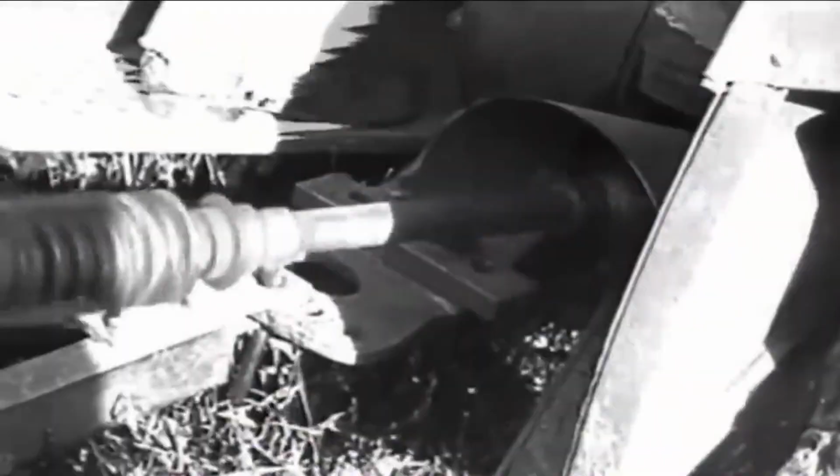The rhythmic hum of modern agriculture conceals a fascinating story about one of farming's most ingenious inventions. Every day, millions of farmers around the world rely on a mechanical marvel that transformed how work gets done in the fields. Yet most people have never stopped to consider its existence. What is this hidden hero of agriculture, and why did its invention change everything about farming as we know it?

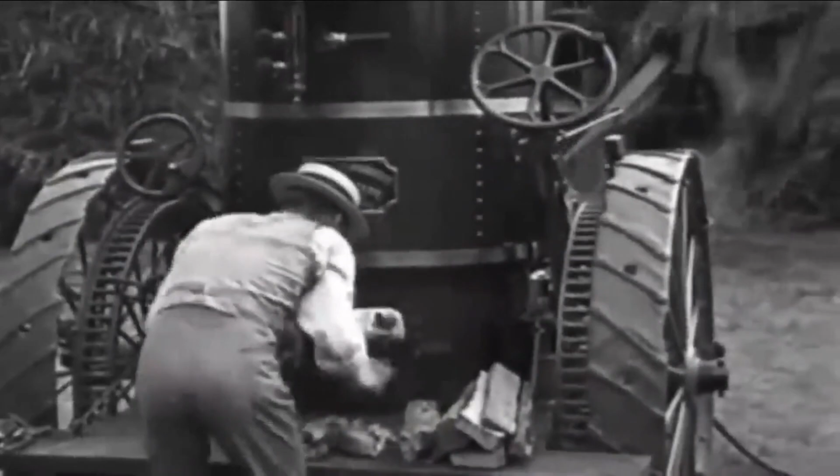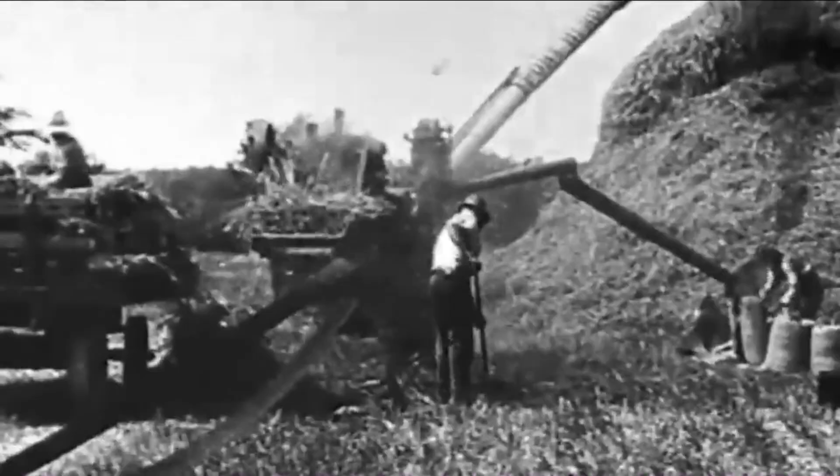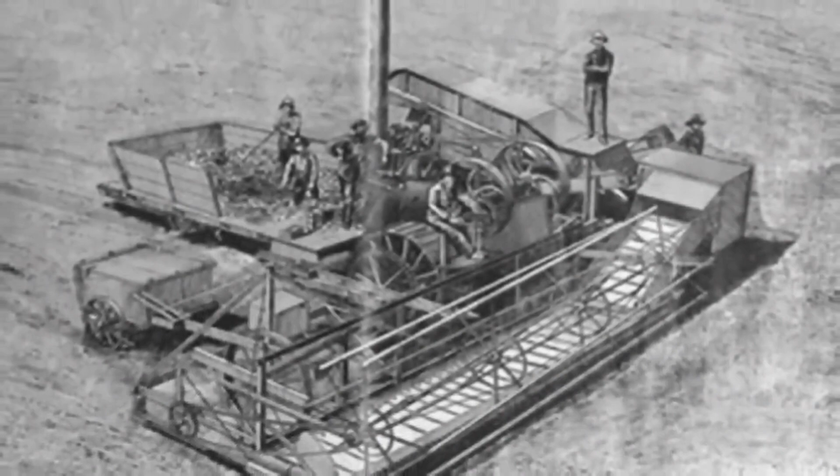Before we can understand this revolutionary device, we need to transport ourselves back to a time when farming was brutally difficult work. Picture the 1800s, when every task on a farm required either human muscle or animal strength. Farmers would spend entire days accomplishing what we can now do in mere hours. The question that haunted every agricultural worker was simple yet profound: how could anyone harness more power without requiring more horses, more oxen, or more exhausted human bodies?

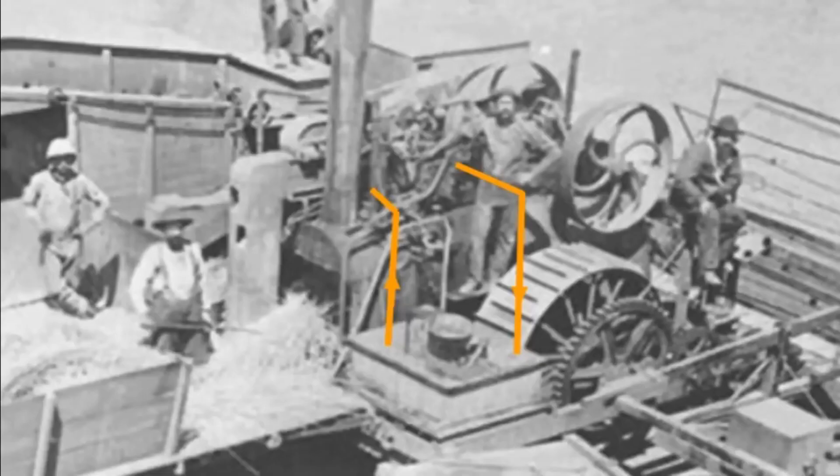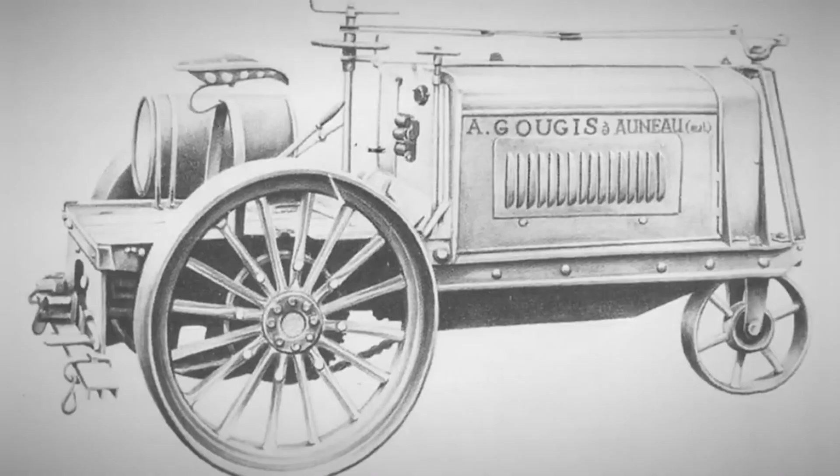The answer began to emerge with the arrival of tractors in the late 19th and early 20th centuries. These mechanical beasts promised to revolutionize agriculture by providing consistent, powerful energy that didn't need rest or food. But here's where things get interesting. The earliest tractors could pull implements across fields, but they couldn't do much else. They were essentially mobile engines on wheels.

So another question arose. If a tractor had all this power sitting there in its engine, why couldn't that power be used for other things besides just pulling?

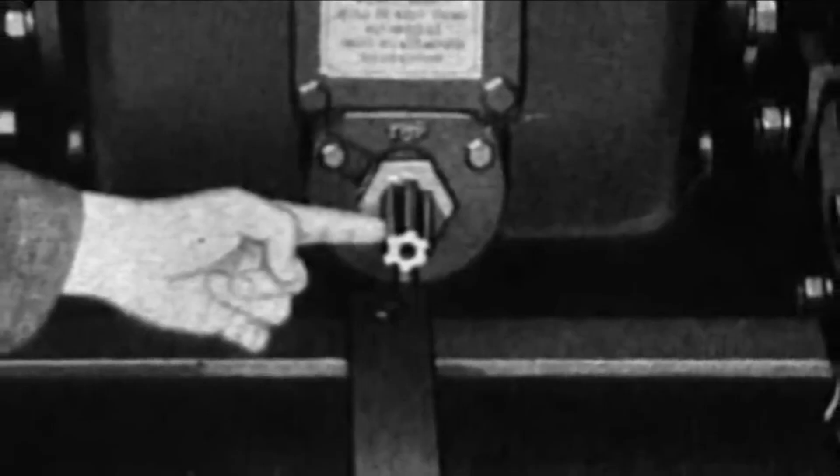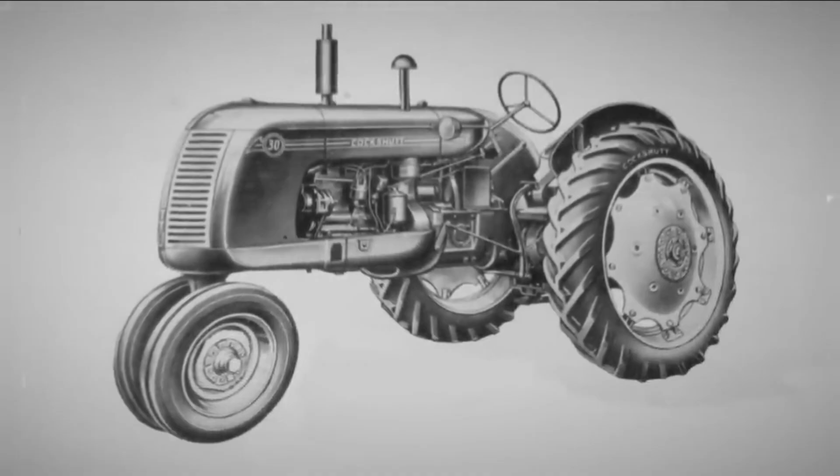Farmers quickly realized that their fields required more than just pulling power. They needed to operate grain threshers, water pumps, sawmills, and countless other machines. The conventional solution was to use belt drives. Workers would position the tractor near the equipment, then connect a long belt from a pulley on the tractor to a pulley on the machine.

This worked, but it was dangerous, inefficient, and frustrating. The belts would slip, break, and require constant adjustment. People lost fingers, hands, and sometimes their lives when clothing got caught in these exposed spinning belts. There had to be a better way, but what would it look like?

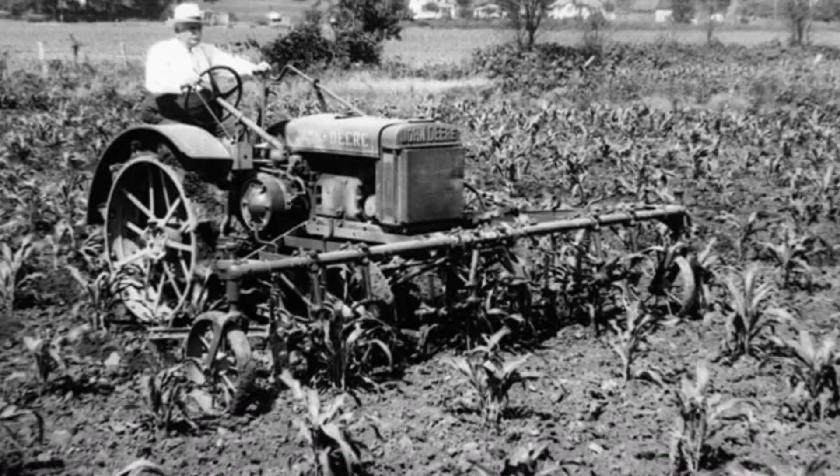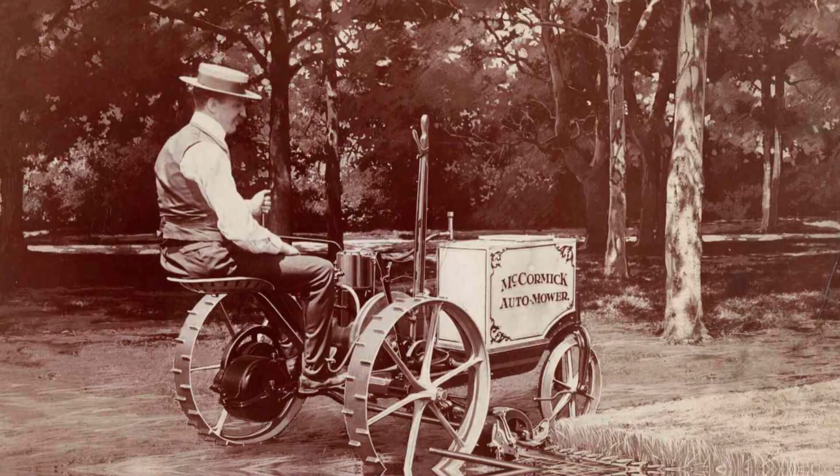The breakthrough came from understanding a fundamental principle of mechanical engineering. Power doesn't have to be transmitted through visible, external means. It can flow through protected, enclosed channels from one place to another. This idea wasn't entirely new. Industrial machinery had been using enclosed shaft systems for decades in factories. But could this concept be adapted for the rough, unpredictable world of farming?

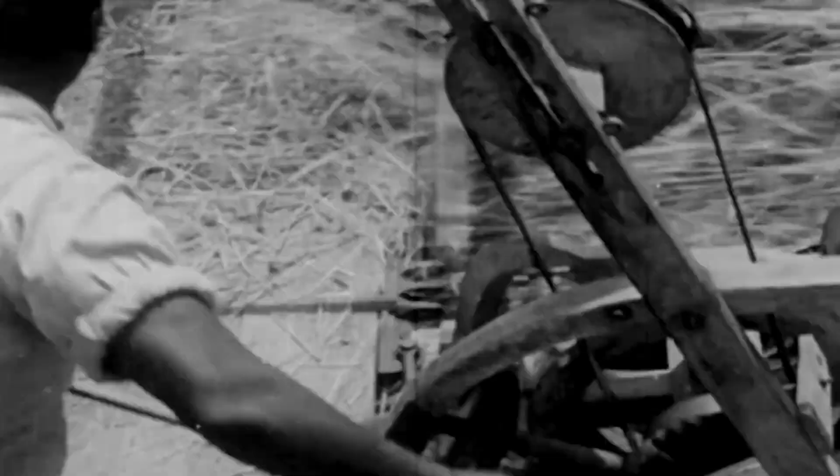Enter the power take-off, often abbreviated as PTO. This device would become the backbone of modern agricultural efficiency. But what exactly makes it so special? At its core, the PTO is deceptively simple. It's a rotating shaft that extends from the tractor, spinning at a standardized speed, ready to deliver power to any compatible implement. Think of it as a universal power outlet, but instead of electricity, it delivers mechanical rotation.

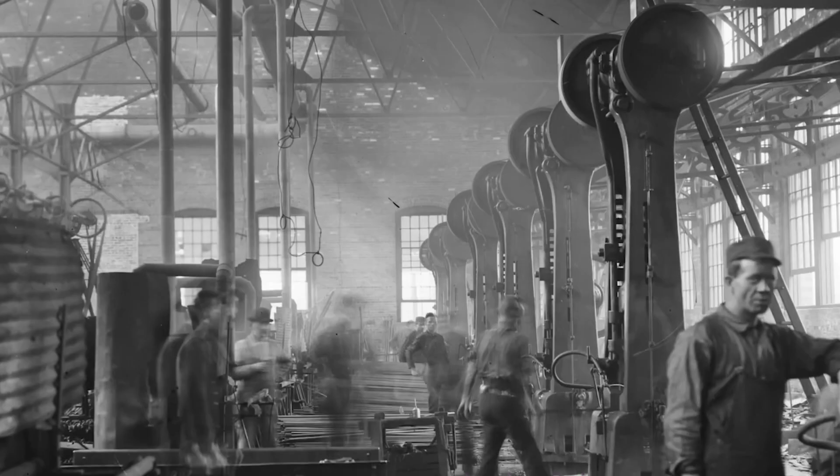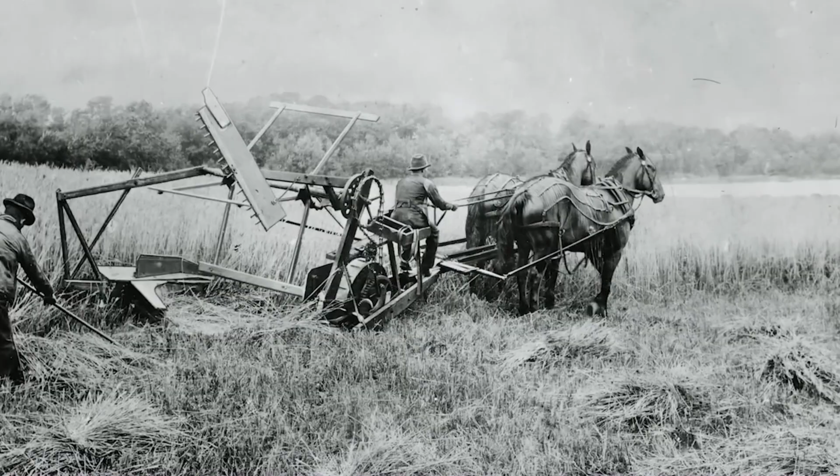The genius of this system lies in its standardization and versatility. Once tractors began including PTO shafts, implement manufacturers could design equipment that would work with any compatible tractor. A farmer could attach a mower in the morning, disconnect it at lunch, and hook up a baler in the afternoon. The same power source could drive completely different machines.

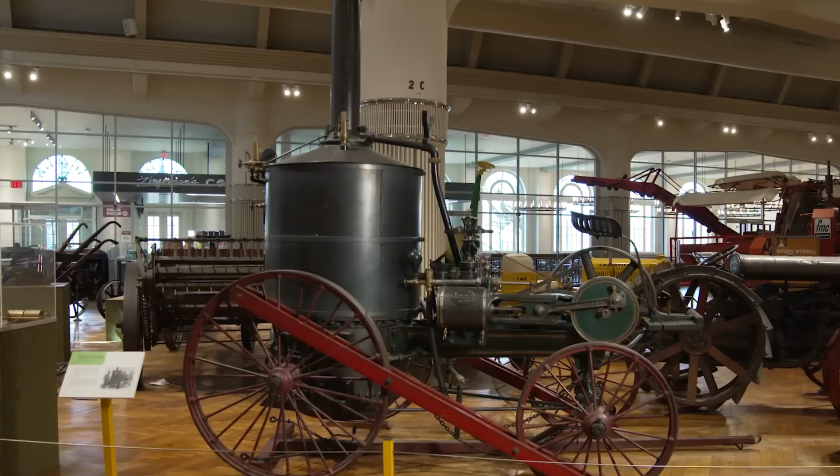Why had it taken so long for someone to develop such an obvious solution? The answer involves understanding the messy reality of agricultural innovation. Unlike factories where conditions are controlled and standardized, farms present endless variables: different crops, different terrains, different weather conditions, different implement requirements.

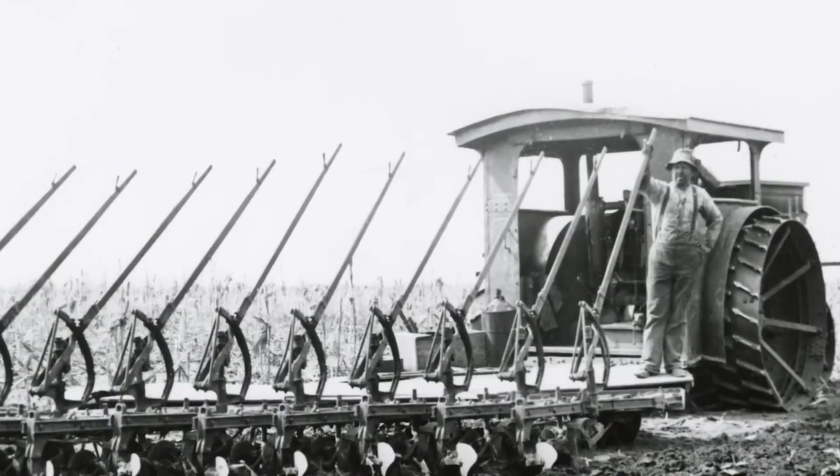Early PTO systems had to overcome numerous technical challenges. What speed should the shaft rotate? How should it connect to implements? How could it remain safe while still being accessible? The International Harvester Company was among the first to seriously tackle these questions. In 1918, they introduced tractors with a rear-mounted shaft that could power threshing machines.

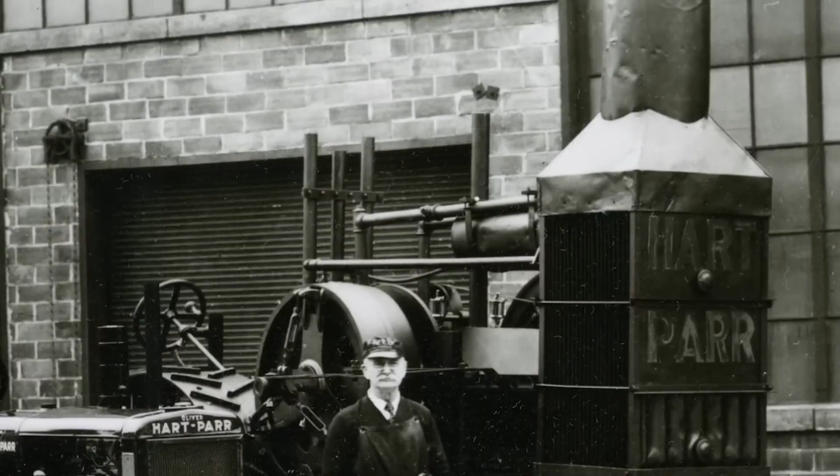Other manufacturers quickly followed. But here's where things got complicated. Each company developed their own system with different specifications. Some PTOs rotated at 540 revolutions per minute. Others used different speeds entirely. The mounting positions varied, and the connection methods differed.

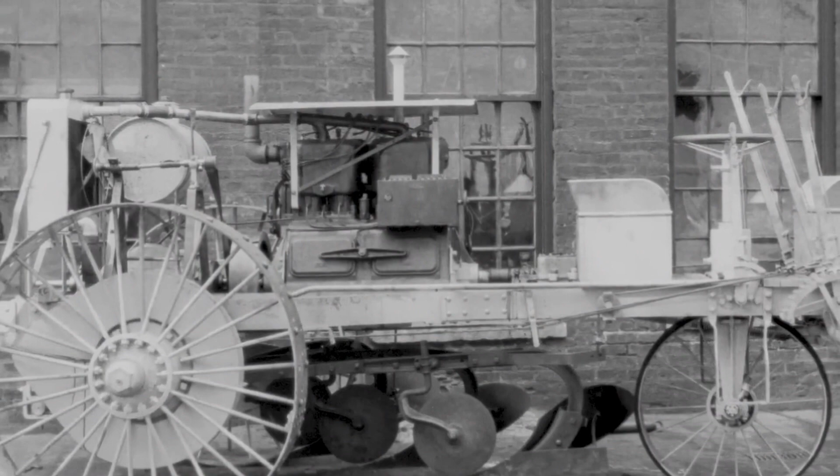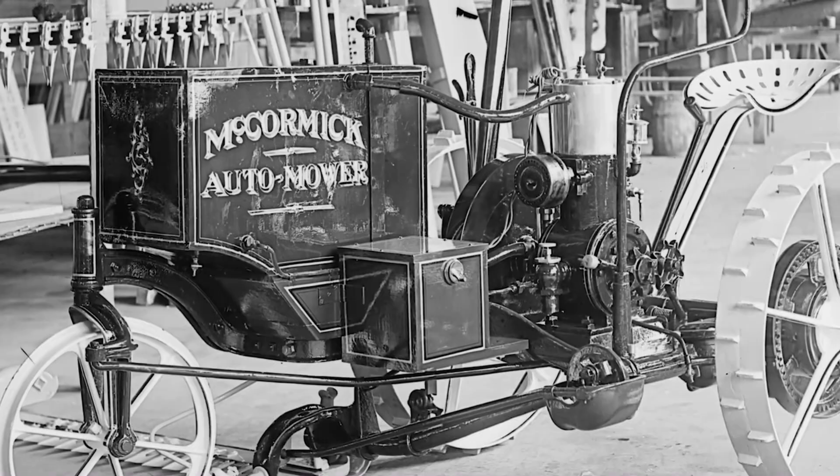It was chaos. Imagine being a farmer in the 1920s or 30s. You might own a tractor from one manufacturer and implements from several others. Would they work together? Maybe, maybe not. You might need adapters, custom modifications, or you might simply be out of luck. This lack of standardization meant that the PTO's full potential remained locked away, tantalizing but frustratingly out of reach.

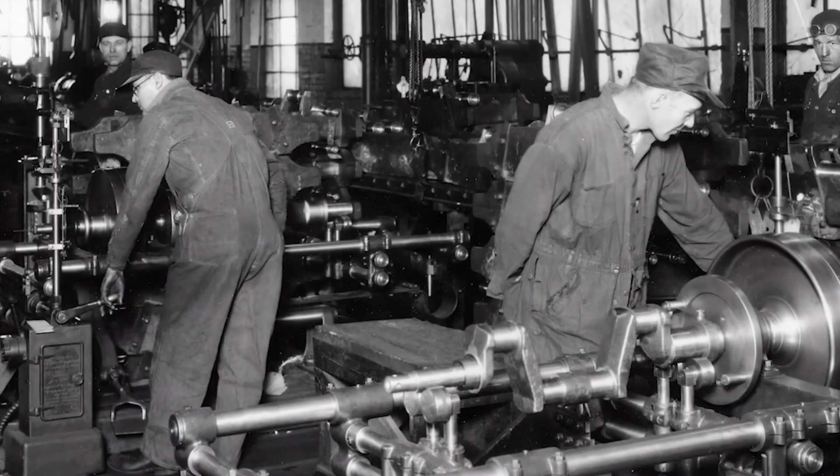Something needed to change, but who would make it happen? The answer came through cooperation and standardization efforts that began in the 1930s and continued through the 50s.

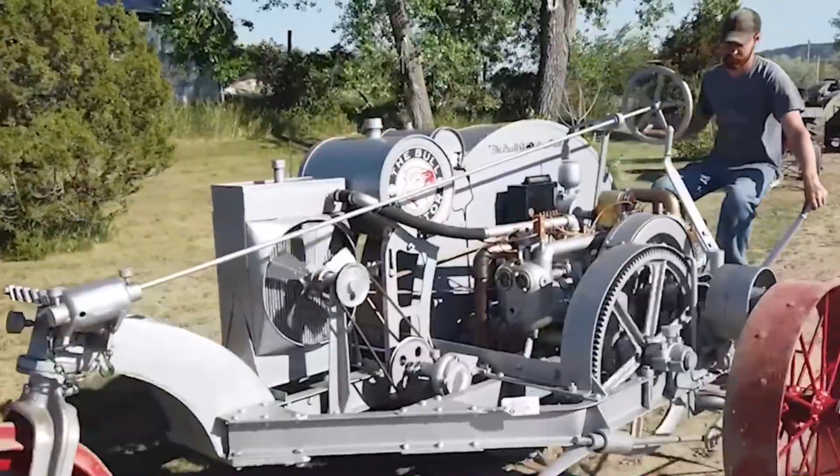Agricultural engineers, manufacturers, and farming organizations recognized that everyone would benefit from agreed-upon standards. The American Society of Agricultural Engineers took the lead in establishing specifications that would become industry norms. They determined that PTOs should typically operate at either 540 or 1,000 revolutions per minute.

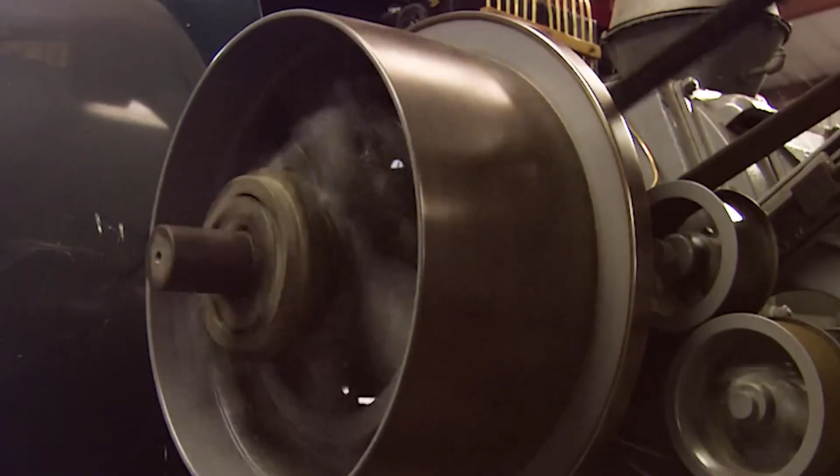They standardized the shaft diameter, the spline design, and the mounting height. Why these specific speeds? The choice wasn't arbitrary. 540 RPM became the standard because it represented a good balance for many common farm implements. It was fast enough to operate most equipment efficiently, but slow enough to be relatively safe and manageable. The 1000 RPM option came later, designed for implements that needed higher speeds, like some mowers and pumps.

These standards transformed the agricultural equipment industry overnight. Suddenly, compatibility became the norm rather than the exception.

But standardizing the tractor's output was only half the battle. The shaft that connects the tractor's PTO to the implement presented its own set of engineering challenges. This connecting shaft needed to do something rather remarkable. It had to transmit tremendous amounts of rotating power while accommodating the fact that tractors and implements move relative to each other. When a tractor turns, or when ground terrain causes the implement to shift position, the connection between them must flex and adapt without breaking or losing power transmission.

The solution came in the form of the telescoping PTO shaft, an elegant piece of engineering that deserves more appreciation than it typically receives. Picture two tubes, one inside the other, connected by splines that allow them to slide in and out while continuing to transmit rotation. At each end, universal joints permit angular movement. These joints work like the ones in your car's drive shaft, allowing the shaft to bend at angles while still spinning. Together, these features create a shaft that can extend, contract, and operate at various angles. How much engineering ingenuity went into making something that farmers could simply connect and forget about?

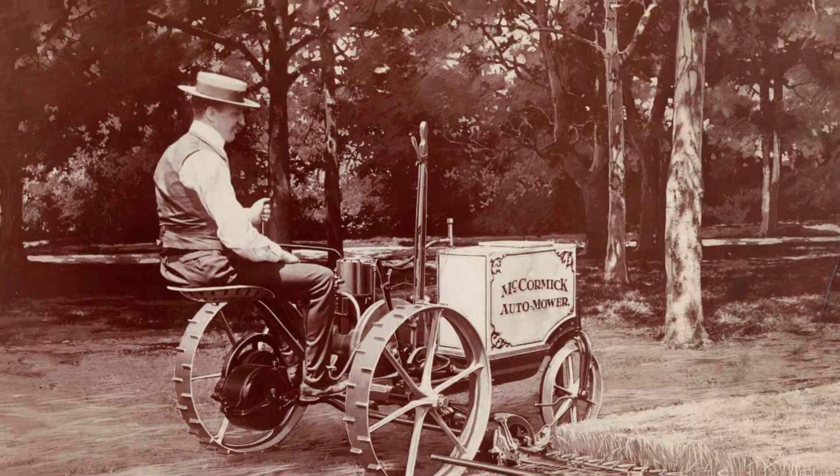The types of implements that PTOs can power seem almost limitless. Consider the rotary mower, one of the most common PTO-driven tools. The tractor's engine spins the PTO shaft, which turns the mower's blade assembly at hundreds of revolutions per minute. The same principle applies to hay balers, which compress cut hay into compact bales. The PTO drives the complex mechanical systems that gather, compress, and tie the hay, transforming loose fodder into manageable packages. Without the PTO, these operations would require separate engines for each implement, adding weight, complexity, and expense.

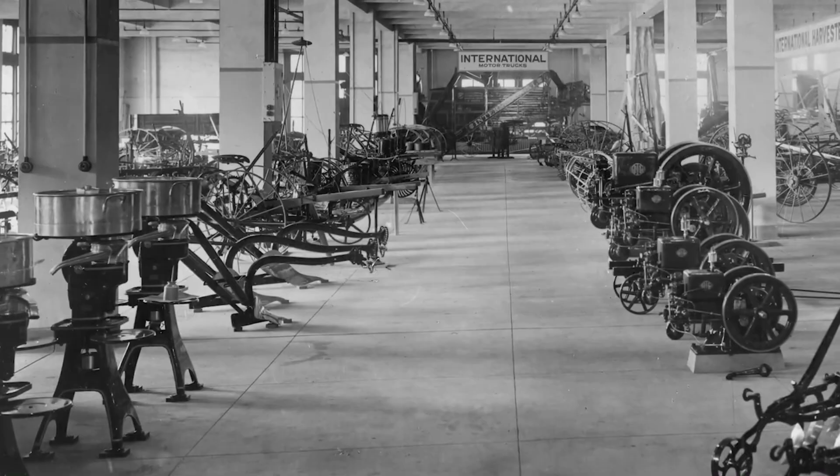Post-hole diggers represent another fascinating application. These auger-based tools drill into the earth, creating holes for fence posts. The PTO provides the sustained rotational force needed to bite through soil and roots. Pump systems for irrigation draw water from wells or streams using PTO power. Spreaders distribute fertilizer or seeds across fields with PTO-driven mechanisms that ensure even distribution. The list goes on: feed mixers, grain augers, wood chippers, snow blowers, and dozens of specialized implements for specific crops and tasks. Each one taps into that standardized power source, spinning away at the rear of the tractor.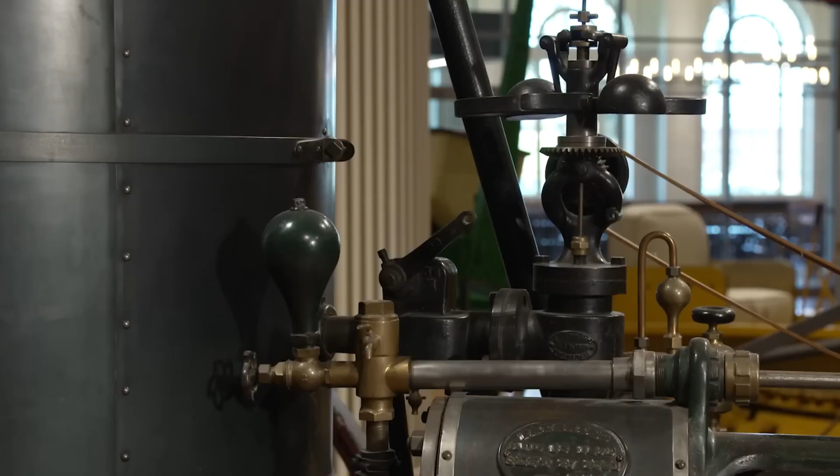But how exactly does the power travel from the tractor's engine to the PTO shaft? Understanding this reveals another layer of engineering sophistication. Inside the tractor, a series of gears and clutches connect the engine's output to the PTO shaft.

Most modern tractors offer independent PTO operation, meaning the PTO can run while the tractor is stationary, or the PTO can be disengaged while the tractor moves. This independence comes from a dedicated clutch system controlled by the operator. Older tractors use transmission-dependent PTOs, where the PTO would only spin when the tractor was in gear and moving.

This limitation meant stopping the tractor also stopped the implement, which wasn't always desirable. Imagine trying to bale hay—you want to keep the baler running continuously while you drive through the field. If your PTO stops every time you pause to adjust your position, you lose efficiency and risk jamming the machinery. Independent PTOs solved this problem elegantly, giving operators full control over when implements receive power.

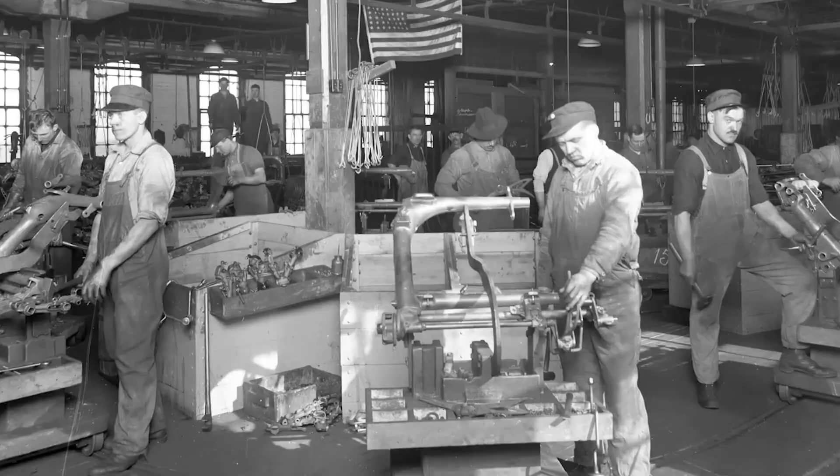The mechanical connection between implement and tractor requires careful alignment and proper installation. Farmers must measure the required shaft length, as using a shaft that's too long or too short creates problems. Too long, and the shaft might bottom out when compressed during tight turns, potentially causing damage. Too short, and the shaft might separate during operation, with catastrophic results.

Proper installation also requires ensuring that safety shields are correctly positioned and secured, that universal joints are adequately greased, and that locking pins are fully engaged. Agricultural equipment dealers and experienced farmers know these procedures intimately, but new farmers often learn through trial and error. The consequences of improper installation can range from annoying equipment malfunctions to serious safety hazards. This reality has led to extensive training programs and safety campaigns. Agricultural extension services provide education on correct PTO usage, recognizing that knowledge saves lives and equipment.

The economic impact of PTO technology on farming cannot be overstated. Before its widespread adoption, farmers needed multiple power sources for different tasks. A farm might have several small engines scattered across various implements, each requiring maintenance, fuel, and eventual replacement. The PTO system consolidated power generation into the tractor, dramatically reducing costs and complexity. One well-maintained tractor engine could power an entire farm's worth of implements. This efficiency made farming more profitable and accessible, contributing to the broader mechanization of agriculture that transformed food production worldwide.

Consider the time savings alone. Tasks that once required days can now be completed in hours. A farmer can mow, rake, and bale an entire field in a single day using PTO-driven implements. Without this technology, the same work might take a week using older methods.

Time savings translate directly to economic advantages. Farmers can manage larger operations with less labor. They can respond more quickly to weather conditions, harvesting crops at optimal times. They can diversify their operations, growing multiple crops or raising livestock alongside crop production.

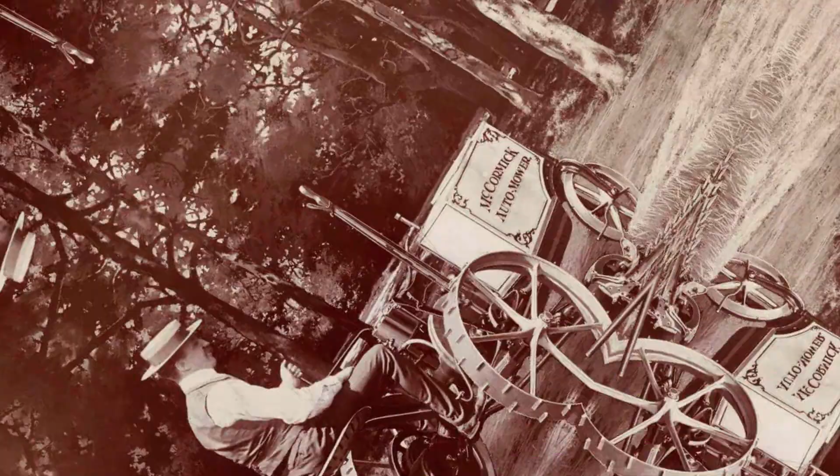Hydraulic systems have also influenced PTO evolution. While hydraulics handle many functions on modern tractors, the mechanical PTO remains essential for high-power, continuous operation tasks. Hydraulics excel at intermittent, precise movements like raising and lowering implements or operating cylinders. But for sustained rotational power, mechanical drive through a PTO shaft remains more efficient and reliable. The two systems complement each other, with modern tractors using both extensively.

The environmental implications of efficient power transmission deserve consideration too. By enabling one engine to power multiple implements, PTO systems reduce overall fuel consumption compared to having separate engines for each machine. Less fuel means lower emissions and reduced environmental impact. Modern tractors with efficient PTO systems can accomplish more work with less fuel than ever before, contributing to more sustainable agricultural practices.

Looking at the agricultural landscape today, it's remarkable to consider how thoroughly PTO technology has been integrated into farming operations. Equipment manufacturers design virtually all tractor-mounted and tractor-towed implements with PTO compatibility in mind. The standardization that once seemed like an impossible goal is now so complete that most farmers never think about it. They simply expect their equipment to work together, and it does.

The reliability of modern PTO systems is equally impressive. With proper maintenance, these mechanical connections can operate for thousands of hours without failure. The simplicity of the core design contributes to this durability. There are no complicated electronics or delicate components in the shaft itself, just hardened steel, precision machining, and robust universal joints. This reliability matters enormously in agricultural settings where breakdowns during critical operations can result in significant financial losses.

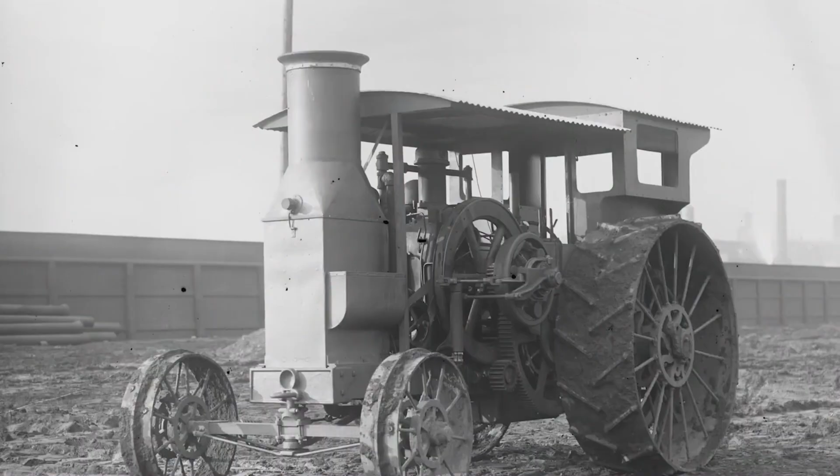Training the next generation of farmers includes comprehensive education about PTO systems. Agricultural colleges and vocational programs teach students about proper connection procedures, safety protocols, and troubleshooting techniques. Understanding PTOs isn't optional for anyone planning to work in modern agriculture—it's as fundamental as knowing how to operate a tractor or recognize crop diseases. This educational emphasis ensures that knowledge about this crucial technology continues to pass from generation to generation.

The diversity of PTO shaft designs reflects the varied demands of agricultural work. Heavy-duty shafts with larger diameters and reinforced universal joints handle high-torque applications like large balers or heavy-duty tillers. Lighter-duty shafts suffice for implements with lower power requirements. Quick connect systems have largely replaced older pin and clip connections, making it faster and easier to attach and detach implements. These seemingly minor improvements add up to significant time savings over a farming season.

Maintenance requirements for PTO systems are straightforward but essential. Universal joints need regular greasing to prevent wear and ensure smooth operation. Shields require inspection for damage and proper function. Splines should be checked for wear, and the shaft tubes should slide smoothly without binding. Neglecting these basic maintenance tasks leads to premature failure and potential safety hazards. Most farmers incorporate PTO inspection into their regular equipment maintenance routines.

The sound of a PTO shaft in operation has become one of the familiar noises of rural life. That distinctive mechanical whir, varying in pitch as load changes, signals that work is happening. Experienced farmers can often diagnose problems by sound alone, detecting bearing wear, misalignment, or excessive load by the characteristics of the noise the shaft makes. This acoustic feedback provides valuable information about system health.

Implement manufacturers publish PTO power requirements for their equipment, allowing farmers to make informed purchasing decisions. A large round baler might require 60 horsepower at the PTO, while a rotary mower might need only 35. These specifications guide farmers in building compatible equipment packages. Using an underpowered tractor with a demanding implement results in poor performance, excessive fuel consumption, and potential damage to both tractor and implement. The math isn't complicated, but it's crucial.

Climate variations affect PTO operation in ways that aren't always obvious. Cold weather makes lubricants thicker, increasing friction, and requiring more power to spin shafts and implements. Hot weather can cause thermal expansion, potentially affecting tolerances in precision components. Dust and mud can infiltrate connections if shields are damaged. Farmers in different climates develop specific maintenance practices suited to their conditions, demonstrating how agricultural technology must adapt to local environments.

The future of PTO technology likely involves increased integration with precision agriculture systems. Already, some advanced tractors can modulate PTO speed based on implement load sensors, optimizing fuel efficiency and work quality. GPS-guided systems might automatically engage and disengage PTOs based on field boundaries or obstacle detection. Electric PTOs driven by hybrid or fully electric tractor systems could offer even finer control and efficiency. Yet the fundamental principle of transmitting rotational power from tractor to implement will likely remain relevant for decades to come.

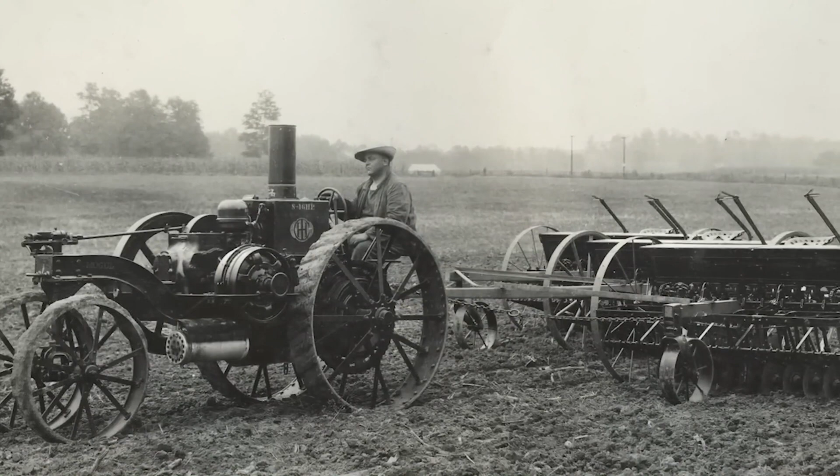Comparing modern PTO systems to their early predecessors highlights how far the technology has progressed. Early systems were crude, dangerous, and inconsistent. Modern systems are refined, safe, and utterly reliable. Yet the basic concept hasn't changed—power still flows from engine to shaft to implement through mechanical connection. This continuity demonstrates that the original vision was sound, requiring only refinement rather than reinvention.

The standardization battles of the mid-20th century offer lessons for other industries struggling with compatibility issues. When competitors recognize that cooperation on standards benefits everyone, entire industries can advance more rapidly. The PTO standardization process wasn't always smooth. Companies had to surrender proprietary advantages and accept compromises. But the result was a more vibrant, competitive market that better served customers. Similar dynamics play out today in electronics, telecommunications, and countless other fields.

Agricultural shows and demonstrations often feature PTO-driven equipment prominently.

Manufacturers showcase new implements, highlighting innovative features and improved efficiency. Farmers attend these events to evaluate equipment and learn about advances in technology.

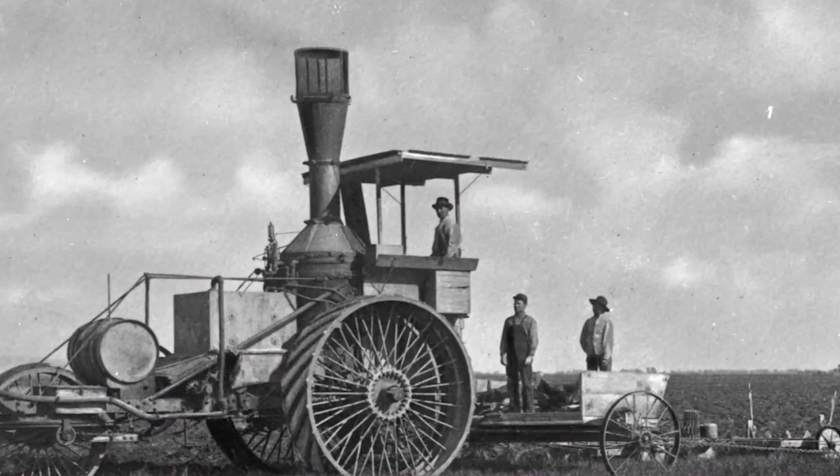As accident statistics accumulated and their human cost became undeniable, governments began mandating safety features for agricultural equipment. In the United States, the Occupational Safety and Health Administration established standards for PTO shielding. European countries implemented similar regulations. These mandates created a legal framework that pushed manufacturers to prioritize safety even when it added to production costs.

Farmers themselves sometimes resisted these safety improvements, not out of recklessness, but from practical concerns. Early shields could be clumsy and interfered with operations if not properly designed. They added weight to implements that were already heavy. And if shields became damaged during use, farmers working remotely from repair facilities might simply remove them rather than interrupt their work schedule.

This tension between safety and operational convenience sparked ongoing dialogue between farmers, manufacturers, and safety advocates about how to design protection that people would actually use.

The solution emerged through iterative design improvements informed by user feedback. Modern PTO shields incorporate quick-release mechanisms that make removal and reinstallation straightforward when legitimate maintenance requires it. They're designed with clearances that prevent interference with normal operation. And they're built from durable plastics and metals that withstand abuse while remaining relatively lightweight. These refinements made shields practical enough that most farmers now accept them as essential equipment rather than optional accessories.

Keep shields in place and in good condition. Wear fitted clothing without loose ends that could catch. Tie back long hair. Never step over or reach across a spinning PTO shaft. Disengage power before connecting or disconnecting implements. Never attempt to clear jams or adjust equipment while the PTO is engaged. These guidelines, simple in principle, but requiring constant vigilance in practice, have prevented countless accidents.

The introduction of color coding helped make PTO shafts more visible and therefore safer. Many manufacturers began producing shields in bright yellow, orange, or red. These high-visibility colors serve as constant visual reminders that a potential hazard exists. They make it easier to see the shaft's position relative to the operator's body, reducing the risk of accidental contact. For equipment used in low-light conditions, reflective strips or markings provide additional visibility.

Technological advances brought new safety features beyond physical shielding. Some modern tractors include PTO engagement systems that require deliberate action rather than simple lever movement. The operator might need to pull a lever and press a button simultaneously, reducing the chance of accidental engagement. Warning lights and audible alarms alert operators when the PTO is engaged, providing an additional layer of awareness.

These features represent the application of human factors engineering to agricultural equipment, recognizing that preventing accidents requires understanding how people actually interact with machinery. The economic cost of PTO accidents extended far beyond medical bills and lost productivity.

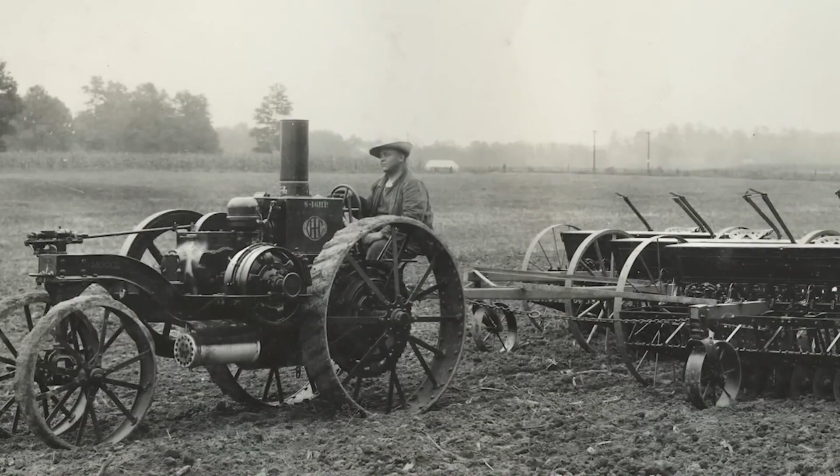The agricultural equipment rental industry faces unique challenges regarding PTO safety. When multiple operators use the same equipment, maintaining consistent safety practices becomes more difficult. Rental companies must ensure that shields remain in place, despite being handled by numerous users with varying levels of experience and care. They must provide clear instructions about proper operation, and they must inspect equipment thoroughly between rentals. These requirements add to operational costs, but are essential for protecting users and limiting liability.

Children on farms represent a particularly vulnerable population regarding PTO hazards. Farm families often involve children in agricultural work from young ages, teaching them responsibility and work ethic while contributing to family operations. However, children may lack the judgment and impulse control to consistently follow safety protocols around dangerous equipment. Many farm accidents involving PTOs have child victims. This reality has led to specific educational programs aimed at teaching farm safety to young people and encouraging parents to restrict children's access to operating equipment until they're mature enough to handle the responsibility.

The mechanics of how universal joints function within PTO shafts deserves deeper exploration. These joints, also called U-joints or cardan joints, consist of a cross-shaped piece with bearings at each arm end. The cross connects two yokes, one attached to each shaft section. As the shafts rotate at an angle relative to each other, the cross rocks back and forth within the bearings.

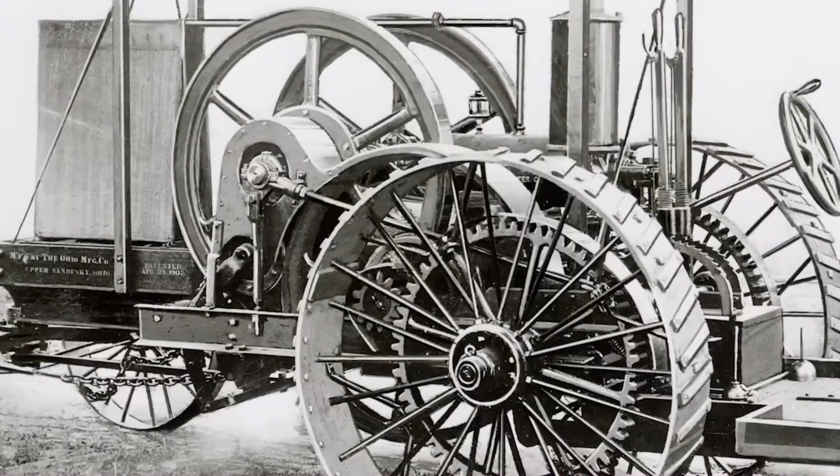Each universal joint has a maximum angle at which it can operate efficiently. Exceed this angle, and several problems occur. The joint binds and creates resistance. Bearing wear accelerates dramatically, and the rotational speed varies throughout each revolution, creating vibration and uneven power delivery. This phenomenon, called angular acceleration, becomes more pronounced as the angle increases. Manufacturers specify maximum operating angles for their PTO shafts, typically between 30 and 40 degrees. Exceeding these specifications leads to premature failure and poor implement performance.

The telescoping sections of PTO shafts use splined connections to transmit torque while allowing linear motion. These splines are precision-machined grooves running along the shaft length. The inner and outer tubes have matching male and female splines that slide relative to each other while maintaining rotational coupling. The splines must be manufactured to exacting tolerances. Too loose, and they'll wear rapidly and create dangerous play. Too tight, and they'll bind rather than sliding smoothly. This precision manufacturing contributes significantly to PTO shaft cost, but is essential for reliable operation.

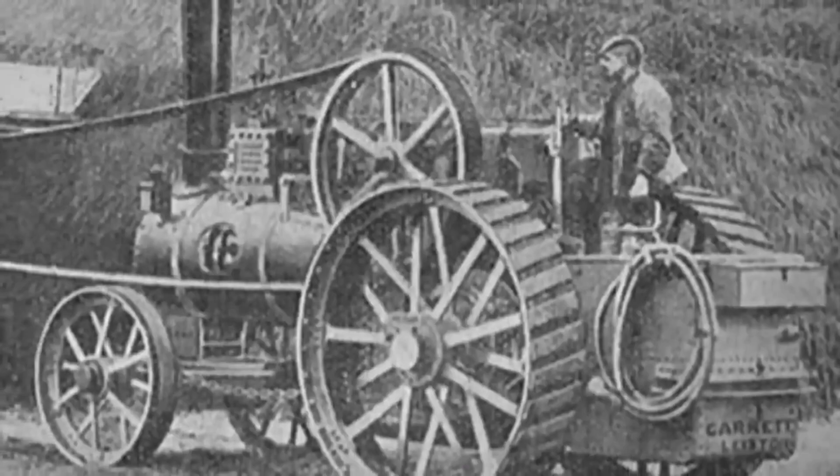Lubrication of splines and universal joints represents critical maintenance that many operators neglect. The constant sliding motion of telescoping sections generates friction and heat. Without adequate lubrication, metal grinds against metal, creating wear particles that accelerate degradation. Universal joint bearings operate under tremendous pressure and speed. Their needle bearings require regular greasing to maintain the oil film that prevents metal-to-metal contact. Most PTO shafts include grease fittings at each universal joint and along the telescoping sections. The recommended maintenance schedule typically calls for greasing every 8 to 10 hours of operation, though conditions like dust or moisture exposure might require more frequent attention.

Different types of PTO shafts serve specialized purposes beyond the standard agricultural applications. Industrial PTOs on trucks and utility vehicles power auxiliary equipment like hydraulic pumps, generators, and compressors. These often operate at different speeds than agricultural PTOs and may include additional features like automatic engagement based on engine speed or vehicle park brake status. Marine PTOs on fishing vessels power winches and processing equipment. Even some vintage automobiles included PTO options for operating tire pumps or other accessories.

The torque capacity of a PTO shaft depends on multiple factors. Shaft diameter plays an obvious role, with larger shafts capable of transmitting more torque before twisting or failing. Material properties matter too, with heat-treated alloy steels providing strength and durability. The spline design affects capacity as well, with more splines distributing load across more contact points. Manufacturers rate their shafts for specific torque values, and users must select shafts appropriate for their application. Using an undersized shaft risks failure during operation, potentially causing equipment damage or injury.

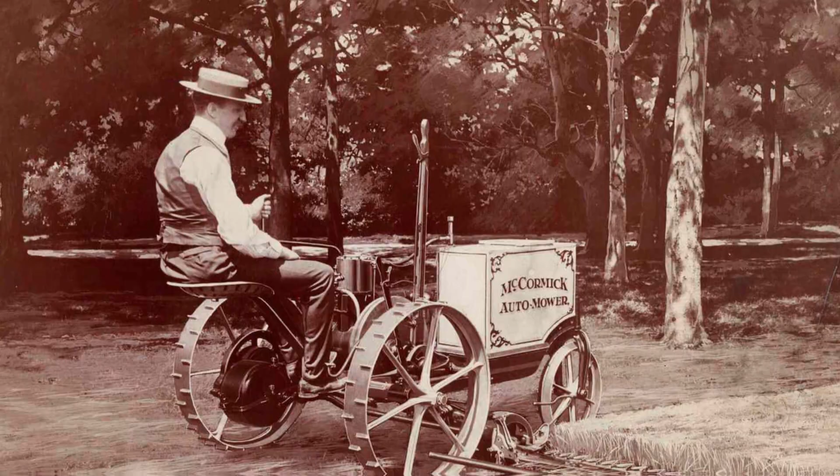These systems use electronic controls and variable ratio transmissions to provide any speed within a specified range. This flexibility allows precise matching of PTO speed to implement requirements, optimizing both performance and efficiency. An implement designed to operate at 750 RPM can receive exactly that speed rather than being forced to accept a standard speed and use internal gearing to achieve the desired operating speed. This technology represents the cutting edge of PTO development, though its complexity and cost currently limit adoption mostly to high-end tractors.

The transition from mechanical to electronic control systems has transformed how operators interact with PTOs. Older tractors used simple mechanical levers directly connected to clutches and shifters. Pull the lever, engage the PTO, push it back, disengage. Modern tractors might use switches or buttons that send signals to solenoid-actuated clutches.

This electronic intermediation enables additional features like soft start and stop, where PTO engagement happens gradually rather than suddenly. Soft engagement reduces shock loads on implements and driveline components, extending their service life. It also makes operations smoother and more pleasant for the operator.

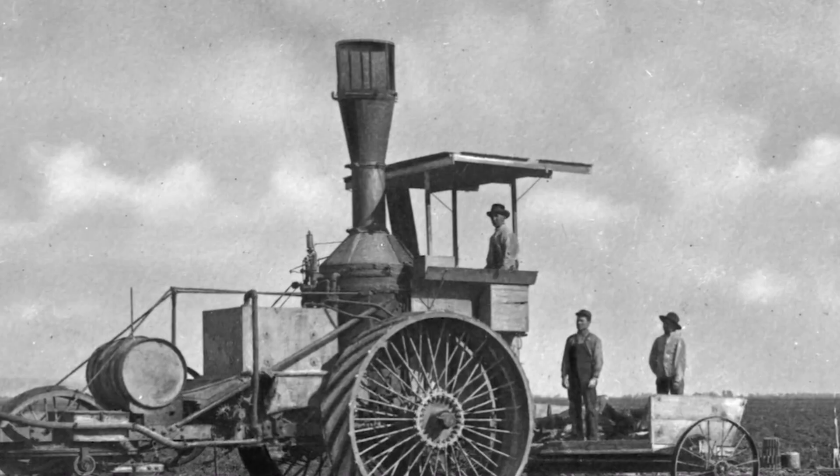Monitoring systems on advanced tractors track PTO operation and alert operators to potential issues. Sensors measure shaft speed, torque output, and temperature at various points. If torque exceeds safe levels, the system might automatically disengage the PTO to prevent damage. If temperature rises above normal ranges, indicating inadequate lubrication or excessive load, warning lights and alarms alert the operator. These monitoring capabilities transform PTO operation from a relatively blind mechanical process into one with full visibility into operating parameters.

The global nature of modern agriculture means that equipment standardization extends beyond physical dimensions to include regulatory compliance across different jurisdictions. A tractor manufactured in Germany for sale in Australia must meet Australian safety standards. An implement made in the United States for export to Brazil must comply with Brazilian regulations. This international regulatory complexity has generally converged around similar requirements, thanks in part to international standards organizations that work to harmonize rules across borders. The result is that PTO equipment can move relatively freely in international trade, benefiting farmers worldwide with access to diverse, competitive equipment options.

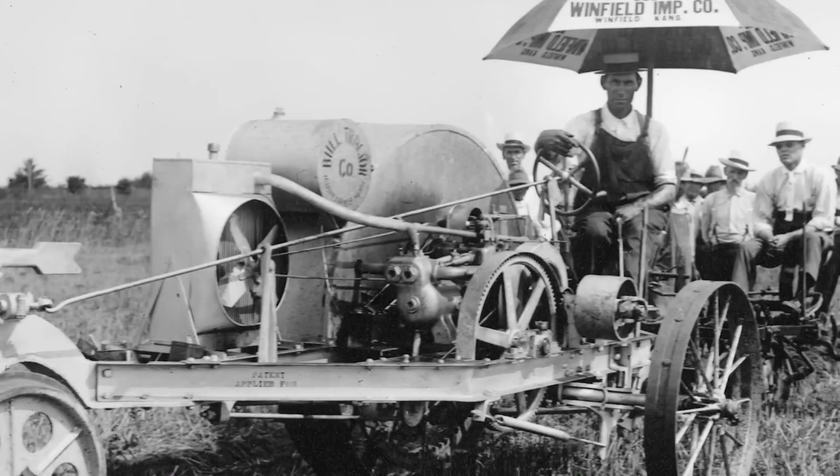Training simulators have emerged as valuable tools for teaching safe PTO operation without the risks associated with real equipment. These simulators use virtual reality or computer displays to recreate the experience of operating tractors and PTO-driven implements. Trainees can practice connecting implements, engaging PTOs, and responding to various scenarios including equipment malfunctions and emergency situations. The simulators can introduce dangerous situations that would never be created with real equipment for training purposes, allowing learners to experience the consequences of unsafe practices without actual risk. As this technology becomes more affordable and sophisticated, its use in agricultural education will likely expand.

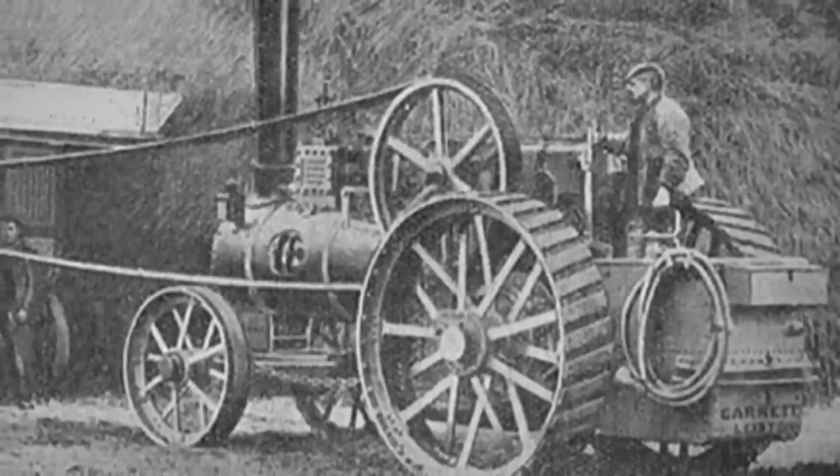The relationship between PTO shaft length and universal joint angles requires careful consideration during installation. When a shaft is fully compressed, meaning the telescoping sections are pushed together as far as possible, the angles at the universal joints should not be at their maximum. Similarly, when fully extended, the shaft should still have overlap in the telescoping section and reasonable joint angles. Achieving this ideal requires selecting the correct shaft length for each specific tractor and implement combination.

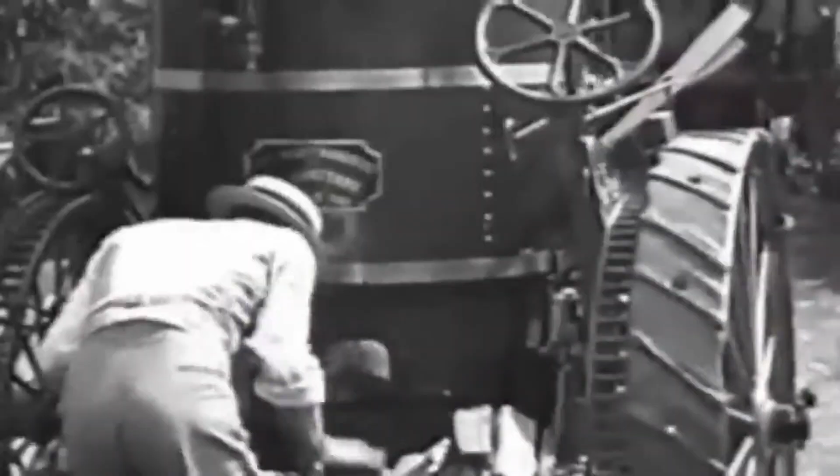Many shafts can be cut to length during installation, but this process requires precision tools and careful measurement to ensure the internal splines aren't damaged.

Environmental conditions dramatically affect PTO shaft lifespan. Equipment operating in dusty conditions, such as during grain harvesting or in arid climates, experiences accelerated wear as dust particles infiltrate bearings and splines. Moisture from rain, dew, or working in irrigated fields promotes corrosion, particularly if shafts aren't cleaned and dried after use. Chemicals from fertilizers and pesticides can degrade seals and attack metal surfaces. Farmers in harsh environments often implement additional maintenance procedures such as more frequent lubrication, regular washing, and protective coatings on vulnerable components.

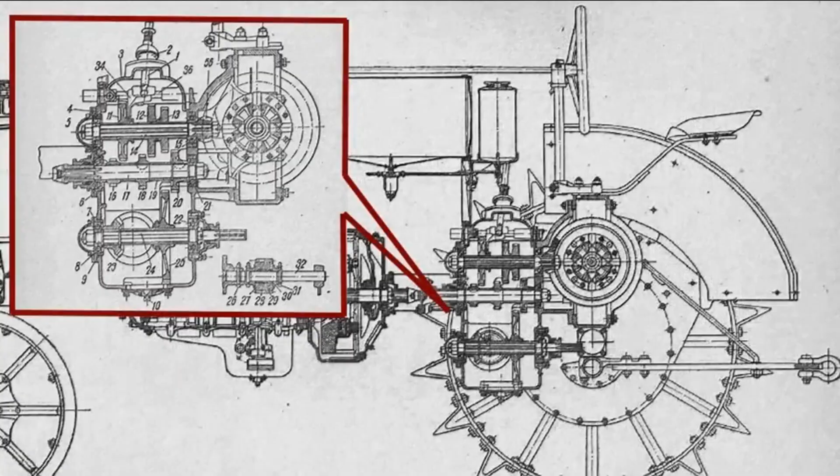The used equipment market for PTO-driven implements is vast and active. Farmers regularly buy and sell used equipment, taking advantage of the standardization that makes a decades-old implement compatible with a brand-new tractor. This equipment longevity and interchangeability benefits smaller operations and beginning farmers who cannot afford new equipment prices. However, buying used equipment requires careful inspection, particularly of PTO shafts and connections. Worn splines, damaged universal joints, and missing or broken shields are common issues with used equipment. Smart buyers either inspect thoroughly themselves or hire knowledgeable mechanics to evaluate equipment before purchase.

The physics of power transmission through PTO shafts involves principles that fascinate engineering enthusiasts. Power equals torque multiplied by rotational speed. A given PTO might deliver 100 horsepower at 1,000 RPM or the same 100 horsepower at 500 RPM, but the torque would differ by a factor of 2. This relationship means that lower speed PTOs must handle higher torque for the same power output, requiring more robust construction.

The engineers who design these systems must balance multiple competing requirements: strength, weight, cost, and compatibility with existing standards. Retrofit markets exist for adding PTO capability to tractors that didn't originally include it, or for upgrading existing systems.

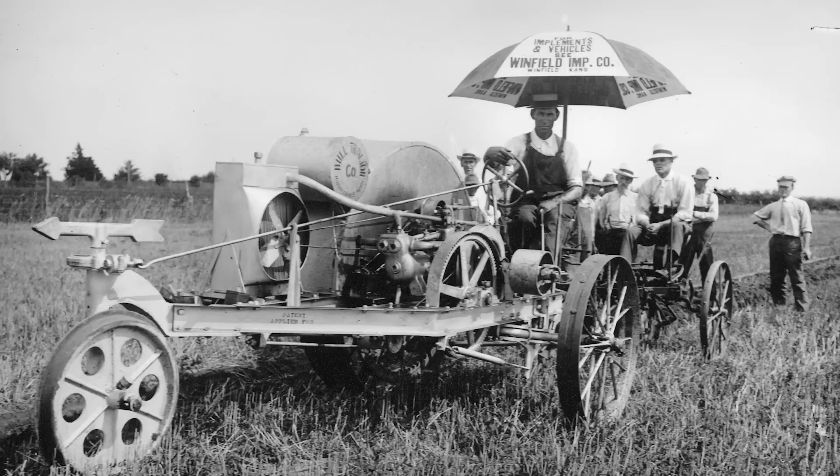These conversions range from relatively simple installations on tractors designed to accept PTOs but not equipped with them, to complex modifications involving custom fabrication and significant mechanical work. Some vintage tractor enthusiasts undertake these projects to expand their tractor's capabilities while maintaining historical authenticity. The availability of retrofit parts and expertise varies considerably depending on tractor make, model, and age.

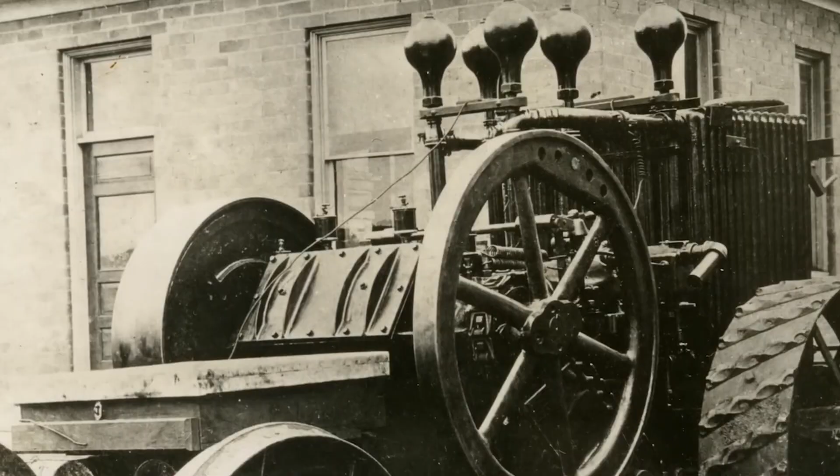Seasonal variations in PTO usage patterns characterize most farming operations. Spring might see intense PTO use for tilling, planting, and fertilizer application. Summer brings mowing and hay production. Fall demands harvesting equipment. Winter might involve snow removal or maintenance work. This cyclical pattern means that PTO components experience periods of intense use, followed by storage.

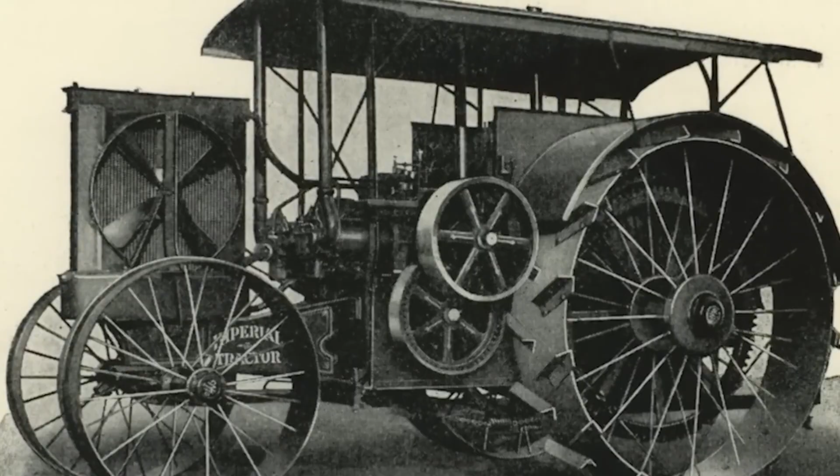Proper preparation before storage, including cleaning, lubrication, and protection from the elements, helps ensure equipment remains in good condition for the next season. Many farmers who neglect this preparation face corroded bearings, seized splines, and other problems when they attempt to resume operations. The spare parts ecosystem supporting PTO equipment is extensive and sophisticated.

Bearings, seals, shields, yokes, and complete shaft assemblies are available through dealers, online retailers, and specialty suppliers. This part availability is crucial for farmers who need to repair equipment quickly during critical operations.

A broken PTO shaft during harvest season can cost thousands of dollars in lost productivity if crops miss their optimal harvest window. Having spare parts on hand, or being able to obtain them quickly from local dealers, makes the difference between a brief inconvenience and a serious setback.

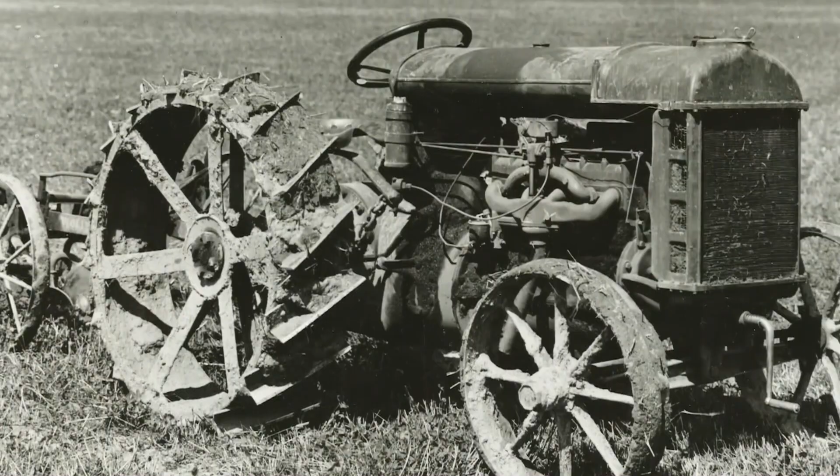Custom and specialty PTO applications sometimes require unique solutions beyond standard equipment offerings. A farmer developing a novel implement might need a PTO shaft with unusual specifications. Industrial users adapting agricultural PTOs for non-farming purposes might need custom lengths or connection types.

A network of machine shops and fabricators serves these needs, creating one-off solutions or small production runs of specialized equipment. This flexibility demonstrates how standardized interfaces enable innovation by making it easier to develop new applications that can interface with existing systems. The future trajectory of PTO technology remains vibrant despite the system's maturity.

Electric tractors present interesting questions about how to implement PTO functionality without a mechanical connection to an internal combustion engine. The solutions might involve electric motors directly driving PTO shafts, with electronic controls providing the necessary speed regulation and power management. Alternatively, hybrid systems might maintain mechanical PTOs powered by engines while adding electric drive for vehicle propulsion.

These developments are already underway in prototype and limited production tractors, pointing toward a future where PTO capability remains, but the implementation details evolve significantly.

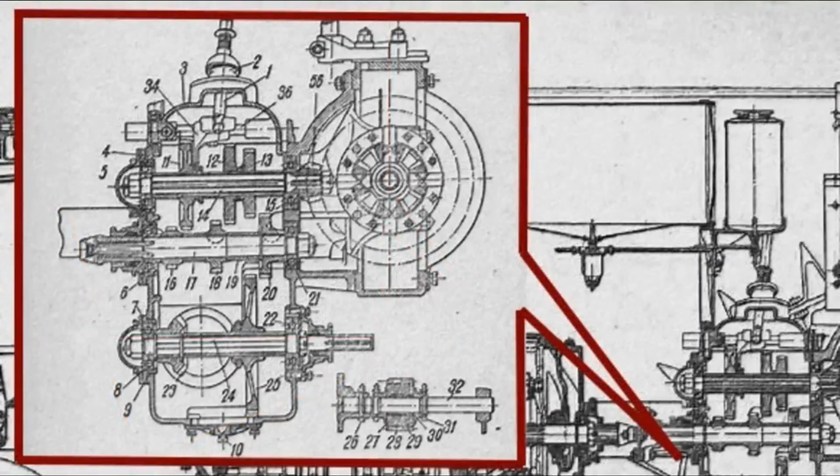A fundamental problem existed: how to efficiently transmit power from tractors to implements. Engineers developed elegant solutions based on sound mechanical principles. Industry cooperation established standards that maximize the benefits for all participants. Ongoing refinement improved safety, reliability, and functionality. And the technology adapted to changing conditions while maintaining compatibility with its past.

These patterns repeat across many technologies, but few examples are as clear or as successful as the humble power takeoff shaft that continues to enable productive agriculture more than a century after its invention.